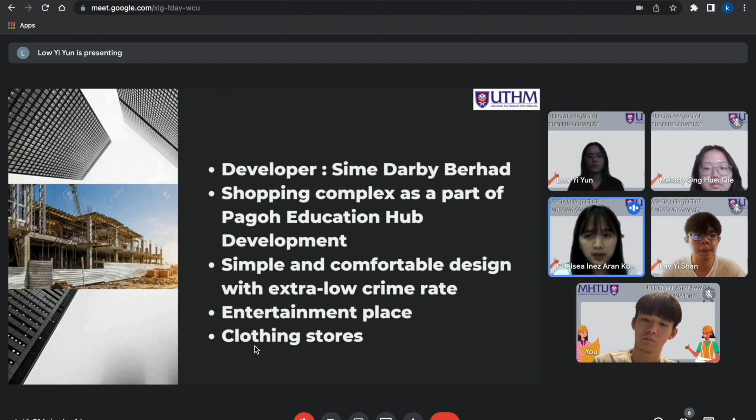Eye2Eye Mall is also built mainly for people to get out of the house for a while and do something to entertain themselves. Eye2Eye Mall is a great place to hang out with friends and family. The beauty parlors in Eye2Eye Mall have also offered the best opportunity for any woman looking for a manicure and pedicure. Eye2Eye Mall has provided amazing opportunities for people to enjoy. If you are looking for a mall that has something interesting to entertain you, Eye2Eye Mall has become your first choice.

Next, I'm going to present about the feasibility study. A feasibility study is a method for establishing if a project or system is feasible, such as assuring that a project is technically, legally, and economically feasible.

Our shopping mall is a multifunction mall, located in Pagoh Education Hub. The area of the land where the mall is established is 1.2 million square feet. The area of the building is 0.8 million square feet, while the parking area covers the rest of the land, which is 0.4 million square feet. The land is located in the center of the city of Pagoh.

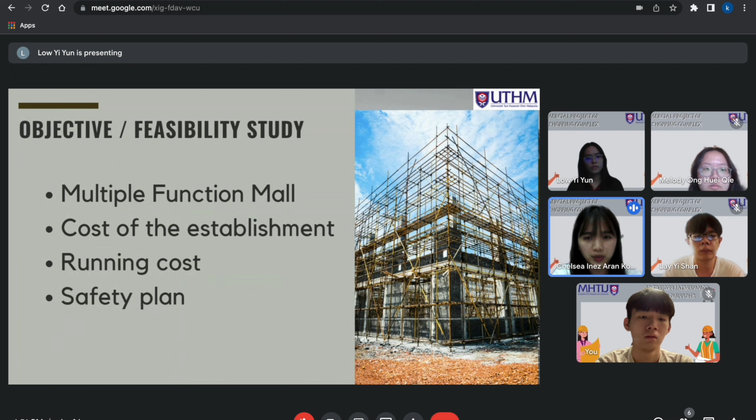Now I will be talking about the building layout. This mall comes with 2 floors and 1 ground floor. This will be the ground floor. It comes with 4 entrances, toilets, parking lot, and market and stores. The main design idea for this mall is to have a simple and comfortable design with an extra low crime rate because of its height, which is only 3 floors.

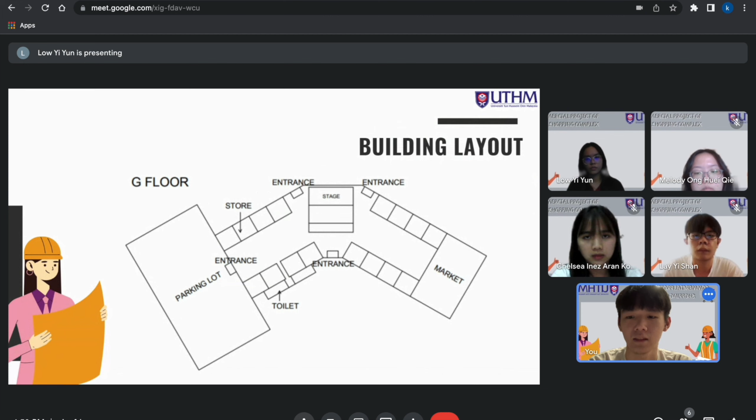This is the first floor and second floor, which have the exact same design, with 4 lifts, toilets, 2 escalators, and market.

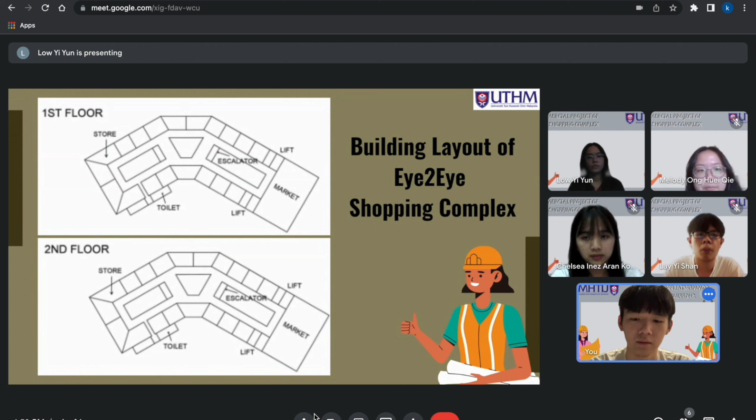Now I will present about the substructure component of the shopping complex. The structure of the whole building is very important. It needs strength and stability. The entire component of the building structure is the foundation and the base beam.

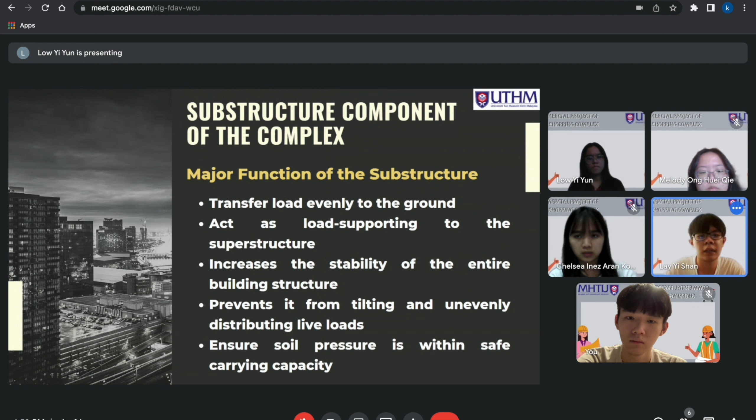What is the main function of the substructure? First, it transfers load evenly to the ground. Second, it acts as a load support to the superstructure. Third, it increases the stability of the entire building structure. Fourth, it prevents tilting and unevenly distributed live load. And lastly, it ensures soil pressure is within safe carrying capacity.

So how to choose the foundation of a building? We need to consider 3 things: first, load on foundation; second, type of soil; third, soil bearing capacity. So the most suitable foundation for the Eye2Eye shopping complex is the shallow foundation.

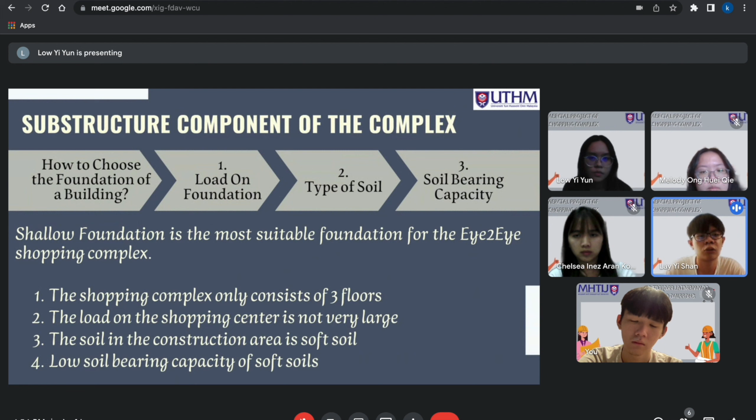This is because the building only consists of 3 floors. The load on the shopping complex is not very large, which is the live load and the wind load. Third, the soil in the construction area is soft soil, where the soil bearing capacity is low.

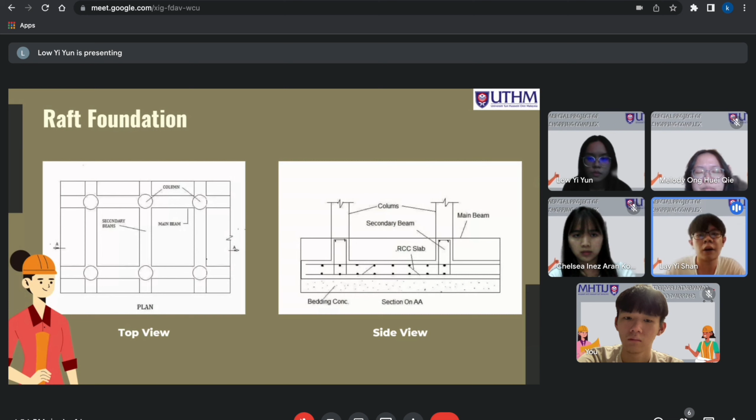Within those shallow foundations, raft foundation is the best choice. Now I will show the top view and the side view for the raft foundation.

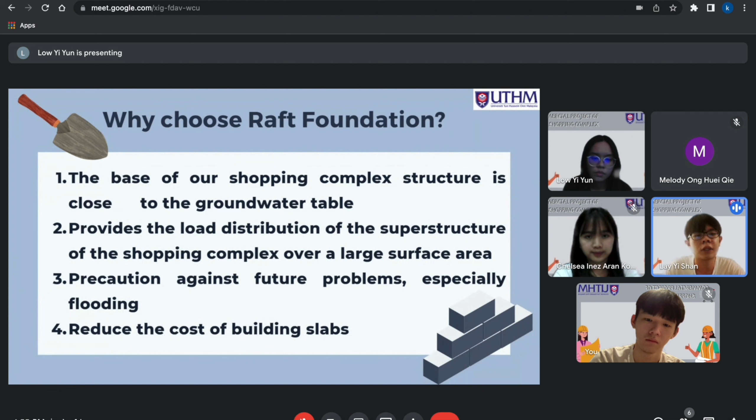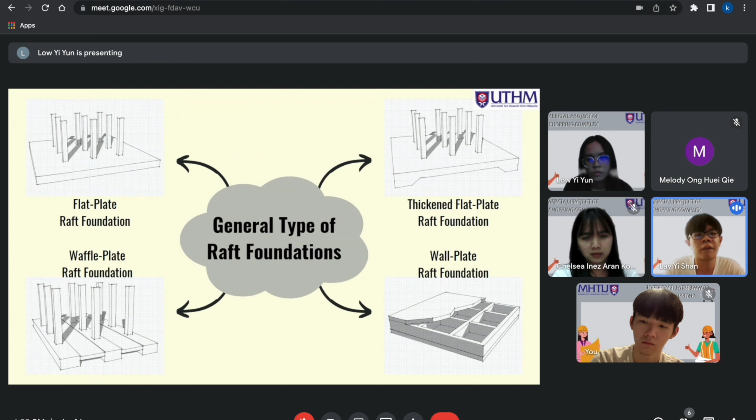There are 4 general types of raft foundation: first, flat plate raft foundation; thickened flat plate raft foundation; waffle plate raft foundation; and wall plate raft foundation.

So we are choosing wall plate raft foundation as our foundation for the shopping complex. This is because when in future the Eye2Eye shopping complex wants to expand, the wall plate raft foundation will play a key role. It can be turned into an underground parking lot, and can also expand the shopping complex downward from the original ground floor.

Third, the exterior of the basement is wrapped in a waterproof layer, which can prevent disasters such as flooding, soil relaxation, and other issues.

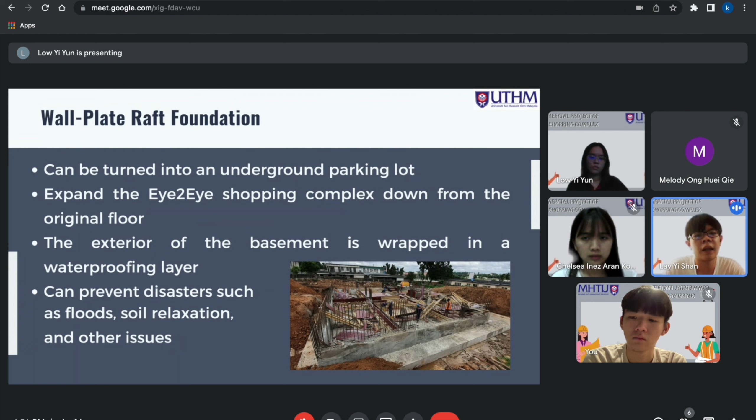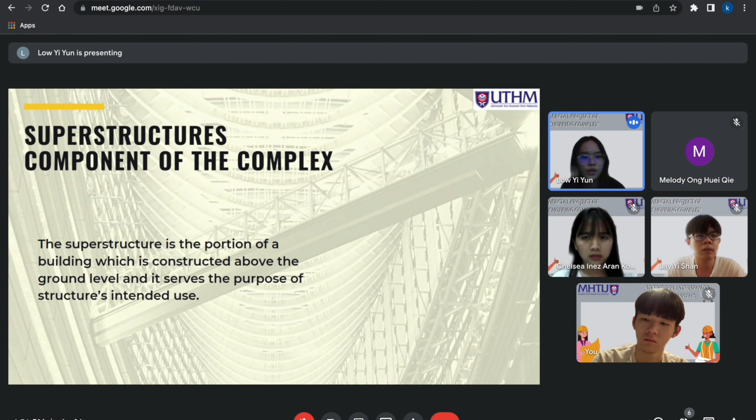So I'm Low Yi Yun. Now I will talk about the superstructure components of the complex. The superstructure is the portion of a building constructed above ground level, and it serves the purpose of the structure's intended use. So we will build the wall in this Eye2Eye mall.

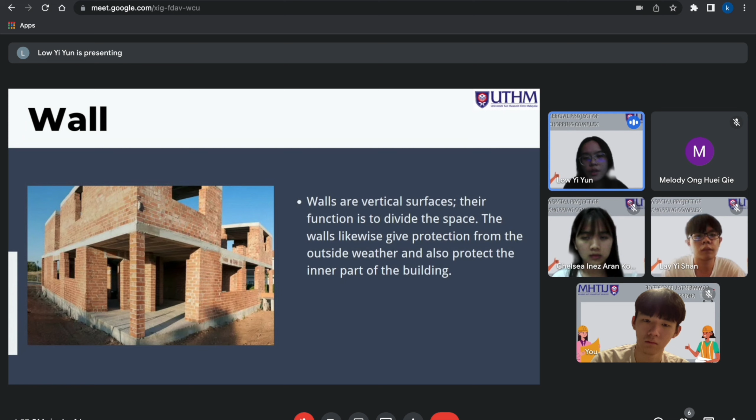As we know, walls are vertical surfaces whose function is to divide the space. The walls also give protection from outside weather and protect the inner part of the building. Second, we will use the beam.

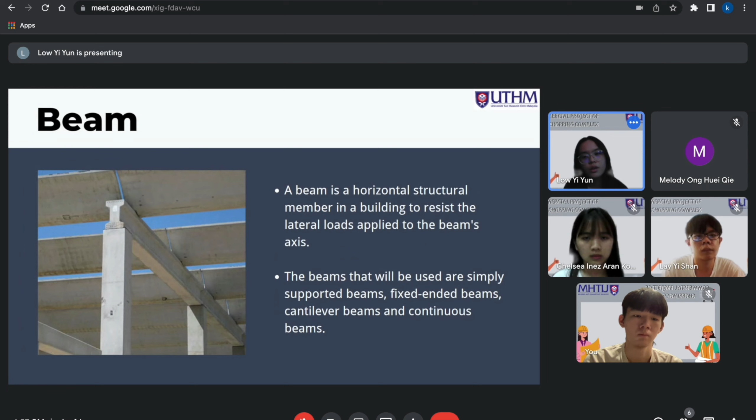A beam is a horizontal structural member in a building used to resist the lateral loads applied along the beam's axis. The beams used in this project are simply supported beams, fixed-ended beams, cantilever beams, and continuous beams.

Next, we will use tile flooring. Tiles are usually thin, square, or rectangular coverings manufactured from hard-wearing materials such as ceramic, stone, metal, baked clay, or even glass. They are generally fixed in place to cover roofs, floors, walls, or other objects such as tabletops. The reason for flooring is to give a dry and clean ground to the building.

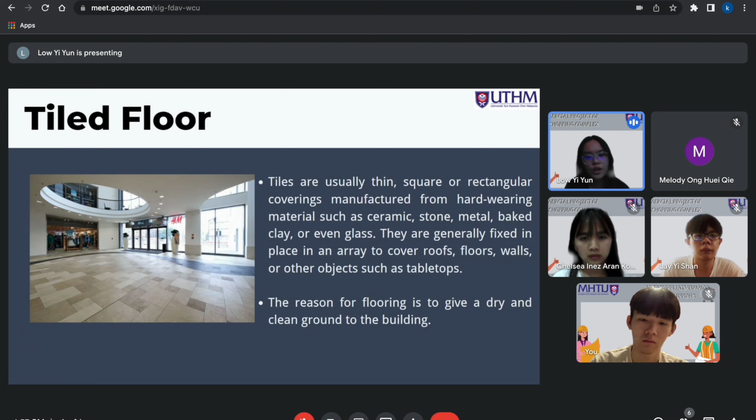Last, for the rooftop, we will choose to use the built-up roof. Built-up roofs tend to provide excellent waterproofing and ultraviolet protection. The aggregate top layer provides a fire-resistant function. Built-up roofing is generally low maintenance and therefore costs little to maintain over its life. That's all from me, thank you.

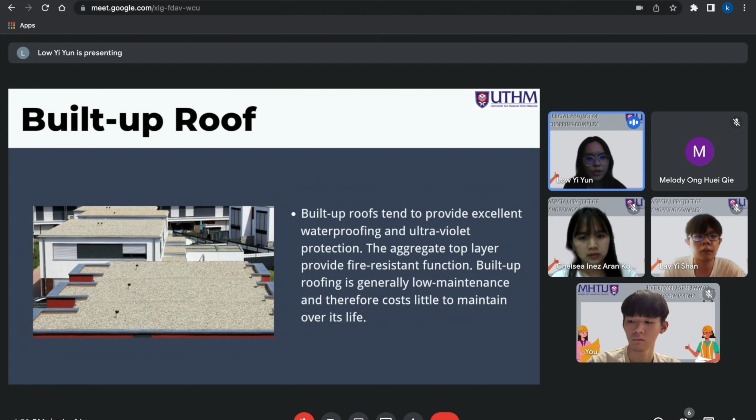Hello, my name is Melody, and now I will proceed with the project costing. For the Eye2Eye Mall, we will spend around 500 million on it. Firstly, for the building material cost, we will use ordinary Portland cement, which will cost 16 ringgit Malaysia per 50kg bag, and we will spend around 11 million on it.

Secondly is the common clay brick, which will cost 60 cents ringgit Malaysia per piece, and here we will use 14 million on it. In addition, normal river sand will cost 45 ringgit Malaysia per metric ton, and here we will use 22 million on it.

Lastly is the mild steel round bar. It will cost 2,300 ringgit Malaysia per metric ton, and the total cost we use for the round bar is 30 million.

And next is the total cost of the project. Firstly, for environment and demolition site work, we will cost 80 million, standing at 16% out of the 100%. Secondly is the building, we will spend around 375 million ringgit Malaysia, standing at 75% out of 100%.

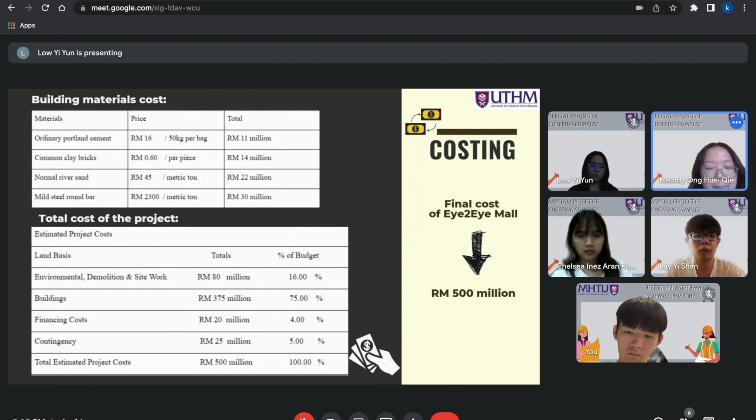And for the project management, firstly, our project is owned and managed by Sime Darby Berhad since 22 March 2022. Sime Darby Berhad had appointed our team as the developer of this project.

The shopping complex will be the major retail center in the integrated modern township of Pagoh Education Hub. The Pagoh Education Hub will involve 4 big IPTAs, which are University Tun Hussein Onn Malaysia, University Technology Malaysia, Polytechnic Tun Syed Nasir Syed Ismail, and lastly the International Islamic University Malaysia.

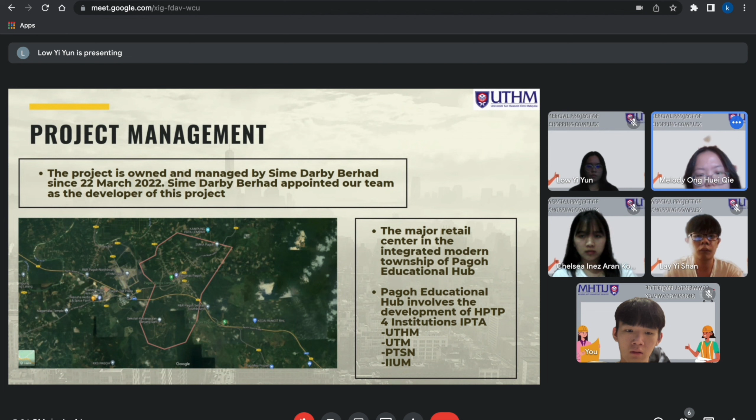For the location of the Eye2Eye shopping complex, we will choose to build it at the Pagoh Education Hub because it is the ideal place to fulfill the quality and future needs of the students, residents, and workers. It is also located in proximity to the UTHM Complex, Sukan Kanu Negeri Johor, and Pagoh Toll Plaza.

As a result, it will attract visitors locally and internationally. Lastly, in the long term, the shopping complex will have high rebates due to the potential of shopping complexes in Pagoh, Johor.

For the shopping complex, we will require 1.8 million square feet of land, and the building area will stand at 1.2 million square feet. We will name the shopping complex Eye2Eye Mall.

The shopping complex will be situated at the Pagoh Education Hub. For the structure, it will have 1.2 million square feet across 3 retail floors, and the 3 retail floors will have 500 branded retailer outlets.

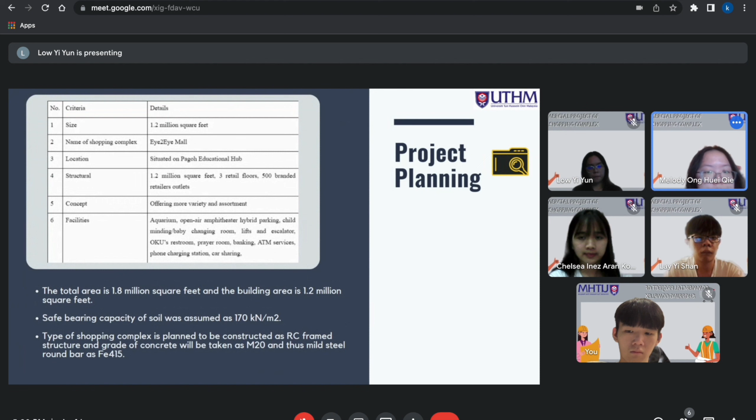The shopping complex will propose to build a dominant retail establishment, planned, developed, and operated as a number of outlets within a center for trade. Here is the ground floor, first floor, and second floor.

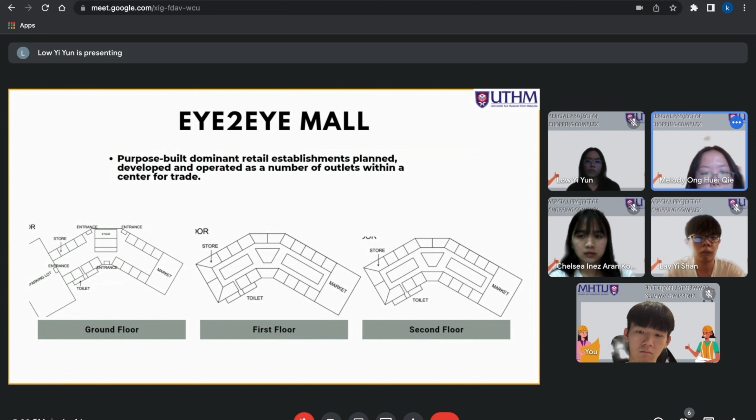Now I will proceed to the bar chart. For the first to fourth month, we will proceed with site preparation. Then earthwork will proceed on the 5th to 7th month. And the basic work will be on the 8th to 9th month.

In addition, the 10th to 12th month will proceed for the ground floor. And the first floor until the second floor will be from the 13th month to the 18th month.

In addition, the roof will proceed on the 19th to 21st month. And the 22nd to 23rd month, we will proceed for the packaging. Lastly, the outdoor work will proceed on the 24th month.

And the whole bar chart will proceed for 2 years.

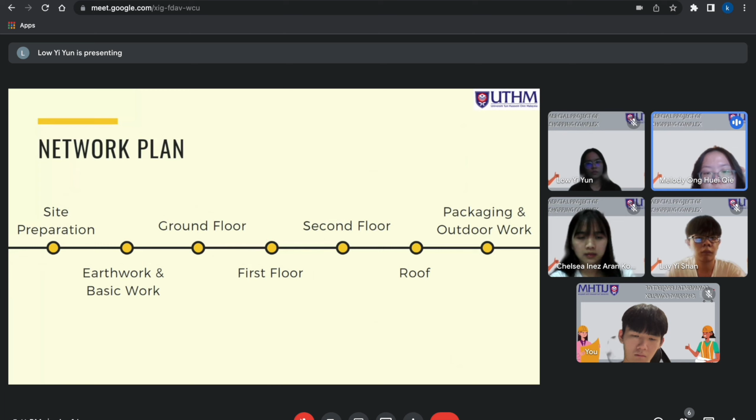Here is our network plan. Firstly, we will do the site preparation, then the earthwork and basic work, ground floor, first floor, second floor, roof, and lastly the packaging and outdoor work. Thank you, that's all from me.

Now I will continue with the conclusion. First of all, the main purpose of the mall is to be the people's first choice when relaxing or in need to purchase something. We are hoping that this project will be completed in 2028.

So the substructure used is the raft foundation. To accomplish waterproofing, it was evident that the substructure of our shopping center should have a raft foundation. So the next will be the design of the mall.

The main design of the mall is to have a simple and comfortable design with an extra low crime rate because of its height, which is a total of 3 floors.

Lastly will be the estimated cost and vision. The total estimated cost of this project will come out to be around 500 million ringgit with 1.2 million square feet. We hope this project will come to fruition in the near future and be a blessing to the people. That's all from us. Thank you.